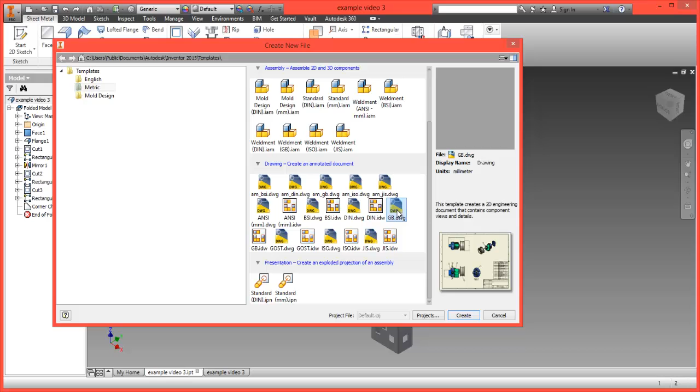Well, first of all, have your component open in front of you, and what we're going to do is we're going to create a drawing file, a 2D drawing file in Autodesk Inventor. So to do that, you simply go to the application button, choose new, and under metric scroll down on the list, and any of these drawing templates will do. I tend to use the gb.dwg file. Choose create, and what that should create is a nice engineering drawing with the border around the edge.

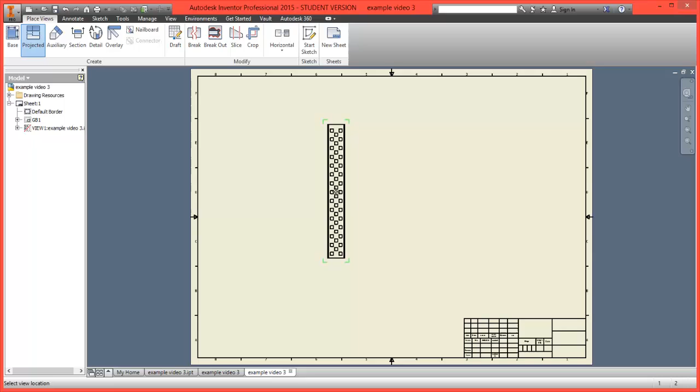Now what you're going to do is you're going to choose base, and what base will do is pick up the component as it appears right now. So as you can see, I've got my C channel here. I can choose the top view of the C channel, and then I can click to the side and then to the other side and to the above and below, and that's a very typical engineering drawing layout. However, of course, that's not in 2D, so that's not flat, and that's no good to me.

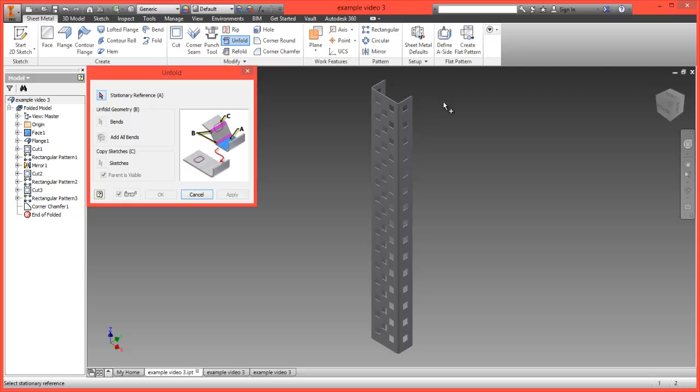So if you remember the previous videos that we looked at, we looked very quickly at the unfold option. So here I have my component open, and I'm going to choose unfold. I'm going to choose the feature, and I'm going to choose the edge, and I'm going to unfold that component. And then I'm going to choose to unfold again this feature and this edge, and select OK. And now my component is totally flat.

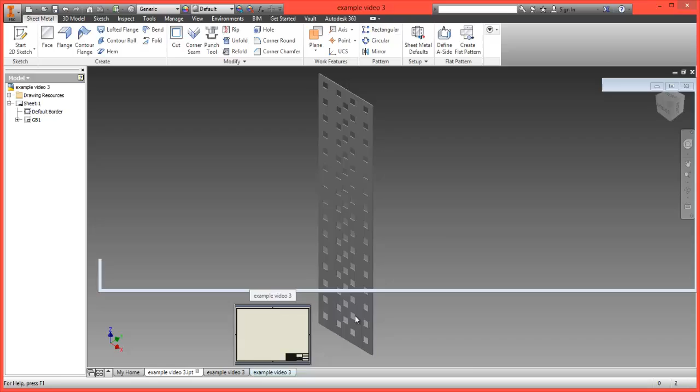Go back to your technical drawing, choose base again, and this time you'll notice that the component looks very different. Now all I need to do is click once here. I don't need a side view or a top view because it's just a single thin strip, and I can just click OK. And what I have now, if I scroll in, is the 2D geometry of the component as it's going to be plasma cut or laser cut out. You'll notice that there's a wider gap between this hole spacing because that's where the metal is going to bend, and that's going to use up some of that material. But I now have a to scale 2D drawing which I can export.

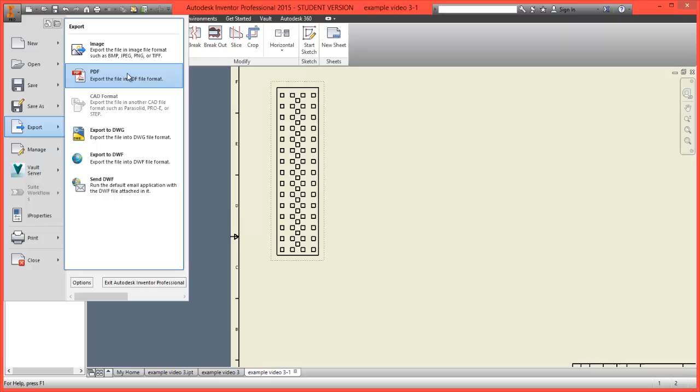So to export files, we go to the application button, we can choose export, and we have a number of options. So we have export to DWG or export to DWF. I would suggest DWG file. And on the drop down we can choose either the AutoCAD version or the Inventor drawing file, and in options I would suggest that you just double check that the components are ISO view and everything conforms to what you expect. You can then save this file as a .dwg file and select yes to all so that all the components are picked up. Select OK, and what we're doing is we're just exporting this as a typical file.

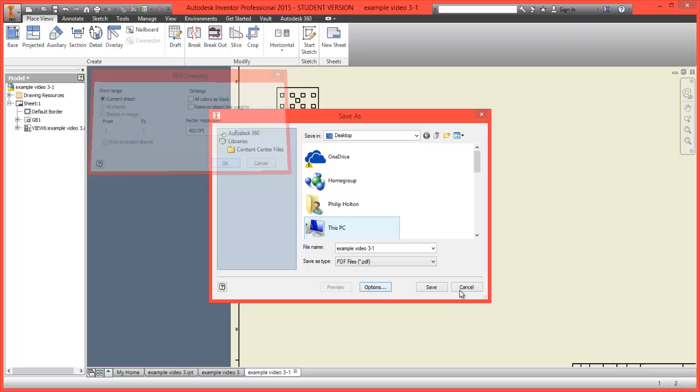You can also export these files as PDF formats, because some laser cutters or plasma cutters will pick up on a PDF. And again, just check your options, check the features and the resolution of the component, and hit save, and that again will export you a file that might be useful depending on what piece of equipment you're using. And likewise, you can take PDFs into other packages, and they can then convert the graphical information here into line work as well. So you can actually put them into other pieces of software, into your post-processing stages, and actually laser cut from those as well.

So have a little play with the various different types of files that you can export. Go to your next version, see what options it comes up with, and publish as many files as you can. Take them into your post-processing software and plasma cut or laser cut them out, and enjoy manufacturing those components.